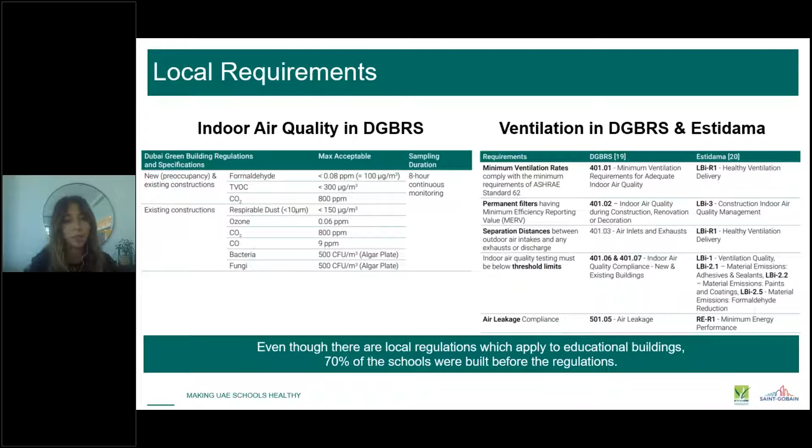So moving on to the international regulation. In the UAE, the most well-known and adopted international label for green building is LEED, version V4 for building design and construction. We have prerequisites for indoor air quality that concern the design of the ventilation system.

We have minimum requirements based on ASHRAE and CEN standards, and additional credits are awarded for enhanced indoor air quality strategies, like indoor air quality assessment, whether before occupancy or under typical normal conditions.

Compared to Dubai Green Building Regulation, LEED is more stringent on formaldehyde and PM limit values. It's also more stringent for TVOC because it includes values for other individual VOC components, whereas the Dubai regulation only sets a limit for total VOC.

Another difference is that LEED recommends ISO methods to measure those pollutants, whereas the Dubai Green Building Regulation recommends continuous monitoring. We will know more about these measuring methods in the case study.

There is also LEED version 4 for existing buildings for operation and maintenance, and credits are also granted for enhanced indoor air quality strategy, which covers CO2 monitoring on a regular basis.

We also have WELL standards. In version 2, there's more focus on occupants' comfort, well-being, and health compared to LEED. For air quality, WELL version 2 has a total of 14 criteria, out of which 4 are mandatory and 10 are optional. The ventilation requirements are the same as LEED, but WELL version 2 has stricter value limits on indoor pollutants.

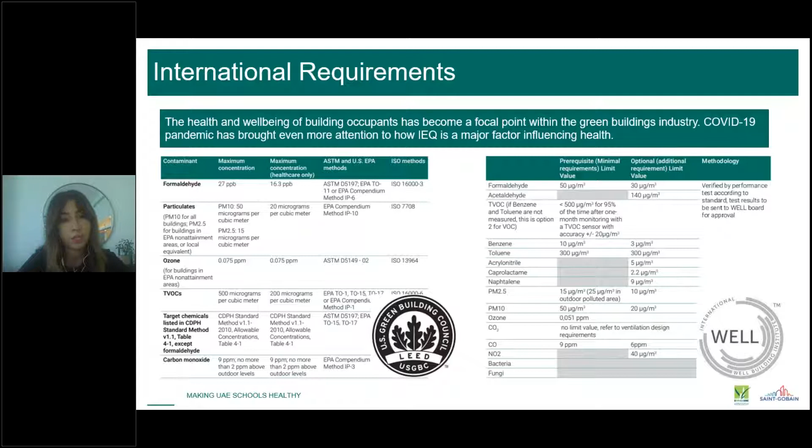Hello, can you hear me? Yes, Valérie. Cool. So Jason, do I have the lead on the slide? I have the hand on the slide? Yeah, I'm just going to hand over controls to you, Valérie. Just give me one moment. No problem. So thank you very much, and good morning, everyone. Sorry for the delay, I had some technical issue to connect, but now everything goes well.

So I'm very happy to be here this morning and to present with Vincent the result of this collaborative project between Saint-Gobain and the Emirates Green Building Council. Before entering into the details of the case study, just a few words about Saint-Gobain and the importance of indoor environmental quality and building science for Saint-Gobain.

Thank you, Jason. I think now I have... no. Oops. Okay.

So actually, innovation is part of Saint-Gobain's DNA, and innovation is not only a matter for the R&D team, it's in fact a joint effort between different functions. It involves R&D, but also marketing, purchasing, and many other functions. And as part of the central R&D organization, it's one of our missions to support our local teams and share with them our expertise.

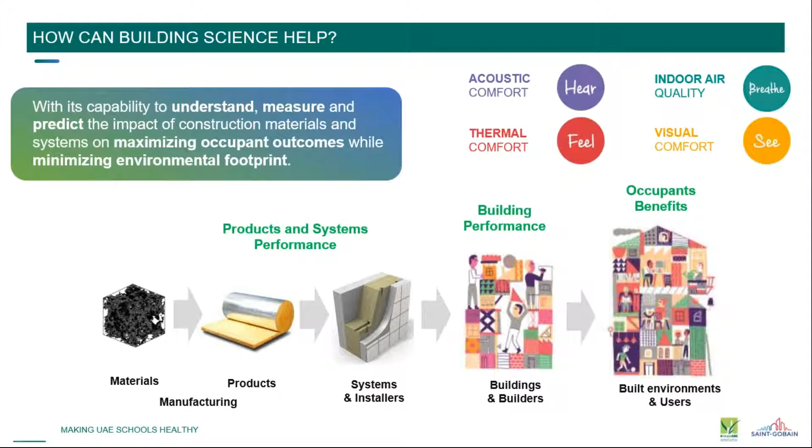And so I am involved with Vincent. We are both working together with the team on the indoor air quality pillar within this building science program. Throughout the years, we have been developing and acquiring knowledge on the different aspects of indoor air quality, and we have in-house facilities to perform experimental tests according to standards, both at lab scale and at full scale.

We also developed some communication tools, such as an edited book. We edited some illustrated booklets which target non-experts in IAQ, available both for our internal team and for our external consumers.

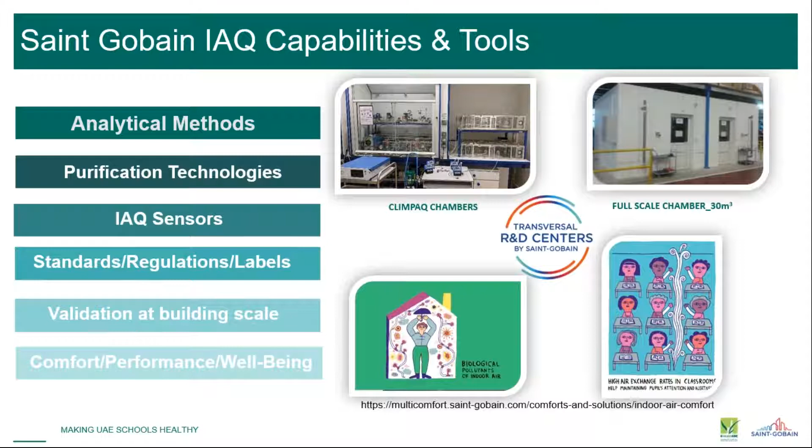Before running the campaign, we had to go through important preparatory steps. The local team had to identify a representative school location and get approval from the school management to perform the case study. Once this first approval was obtained, a school visit was organized to find the representative location within the building where we could perform the measurements. Based on this visit, we designed the case study and detailed experimental setup. With the protocol finalized, we reviewed it with school management again to get final approval, and once everything was fine, we could run the campaign. Those preliminary steps were very important and critical, and the school management was very collaborative during preparation and while we were running the campaign - we were very well welcomed on site.

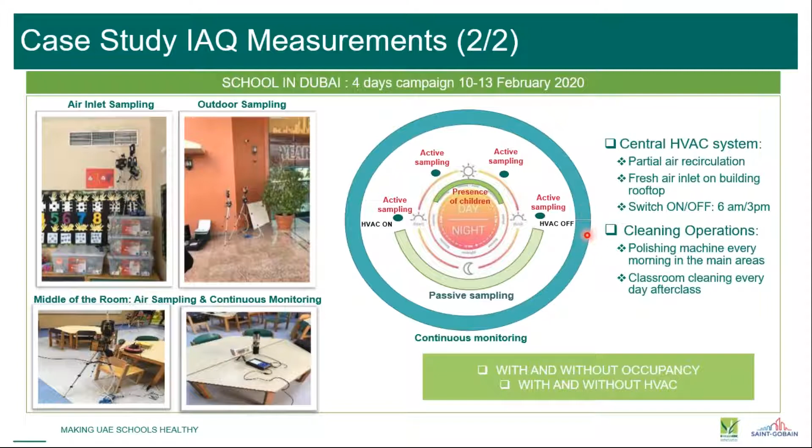The campaign was actually run, as I mentioned, 1 year ago, in February, during 4 days.

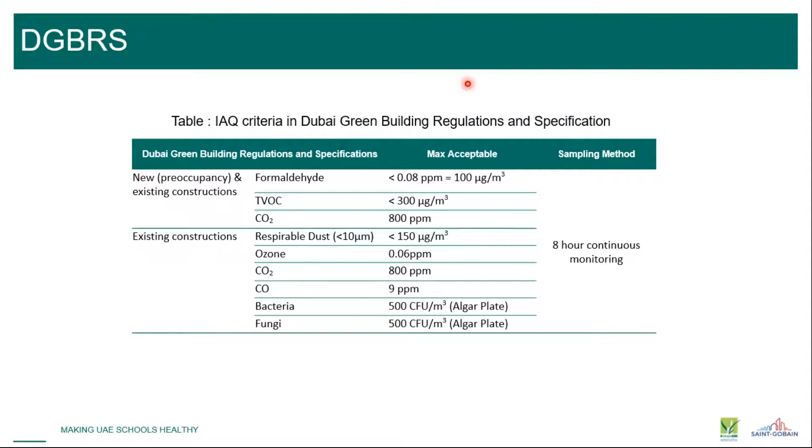For all the measurements we present, we compare each one with the limit values set by the local green building regulations, in this case the Dubai green building regulation that Nada mentioned. When we measure data not mentioned in this regulation, we compare them with other well-known international green building standards such as LEED and WELL.

So let's now enter the details of the study findings.

Carbon dioxide is not directly an indoor chemical pollutant, but it provides very valuable information because it's an indirect indication of the quality of air renewal and of the ventilation system in a room. It's also easy to find inexpensive sensors to measure CO2 concentration continuously.

What is commonly acknowledged is that above a certain concentration of CO2, usually considered to be 1000 ppm, we start to experience some discomfort. In children, it impacts learning abilities and concentration. I'm sure you've all experienced a 2-hour meeting where you feel sleepy after a while, most likely due to a high level of CO2 in the room.

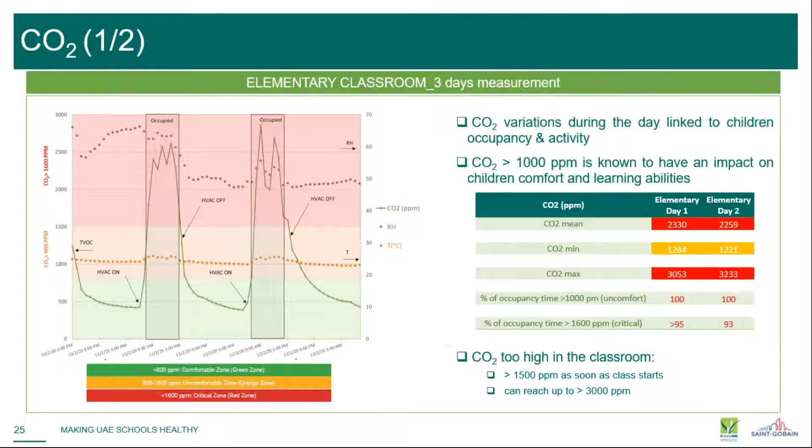We think this is because the HVAC system recirculates part of the air and brings only partially fresh air from outside. We believe this recirculation is the reason for this effect, and it promotes cross-contamination - CO2 coming from the other room to this empty room. What we observe here with CO2 may indicate the same impact of this recirculation on the redispersion of pollutants.

So this indication is also additional information about the HVAC system, which we think could be something we would recommend to improve in the building. One final thing I would like to mention.

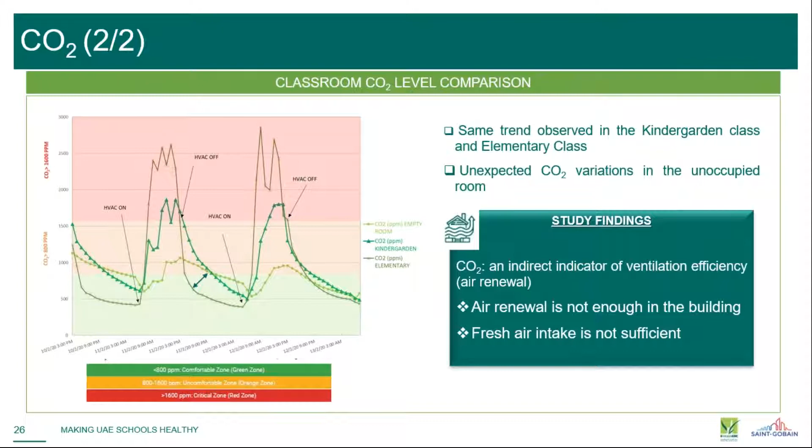So CO2 provides very useful, valuable information. And we also have a look at temperature and humidity. Even if we know they are not direct indicators of indoor air quality in the building, we know they can have an impact on pollutant emission.

On this graph, we have temperature in orange and relative humidity in gray. The table indicates the mean value recorded in the two classrooms over two successive days. We can see the color code comparing this value to the Dubai Green Building Regulation and specification. We observe a difference of temperature between the two classrooms, which we consider to be due to the HVAC settings.

What is important is for relative humidity: we have first a difference between the rooms, but most important is that from one day to the other, we have a significant difference and a decrease of humidity in the classroom.

During the same period, we collected information about outdoor relative humidity level, and actually the variation of indoor humidity level is fully consistent with the variation of outdoor humidity during the same period. So from this, we can conclude that the HVAC system is not doing anything to control humidity indoors; it's just bringing the outdoor humidity in.

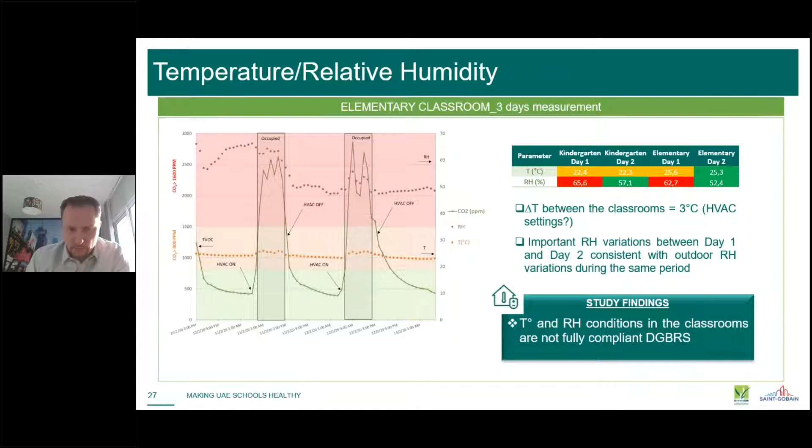So now we will continue with the chemical pollutant evaluation. But first, okay, I want to move the slide. So now we will continue with the chemical pollutant evaluation.

But first, I would like to share some information and take one minute to define the parameters we have considered in the chemical pollutants. The first one, called TVOC, for total volatile organic compounds, is an indicator of the global chemical pollutant level in the room.

There are two different ways to define these results. The first is given by continuous monitoring, where we use a sensor which reacts with chemicals and gives directly a signal on site. The second way is to use air sampling with cartridges, where we catch VOCs on these cartridges, but afterward we need a step in the lab to perform the analysis, so there is no direct reading on site.

In this case, the TVOC value is the sum of all individual VOCs we can obtain between hexane and hexadecane. So it's the definition of this value. That's why it's not exactly the same result between the two ways of measurement.

With air sampling, we have also additional information about the individual VOCs, because with lab analysis we are able to identify each chemical present in the air, and we are also able to evaluate the concentration of each pollutant. This helps establish the link between the pollutant and some health impact or well-being, which is why it's a really complementary approach compared with continuous monitoring.

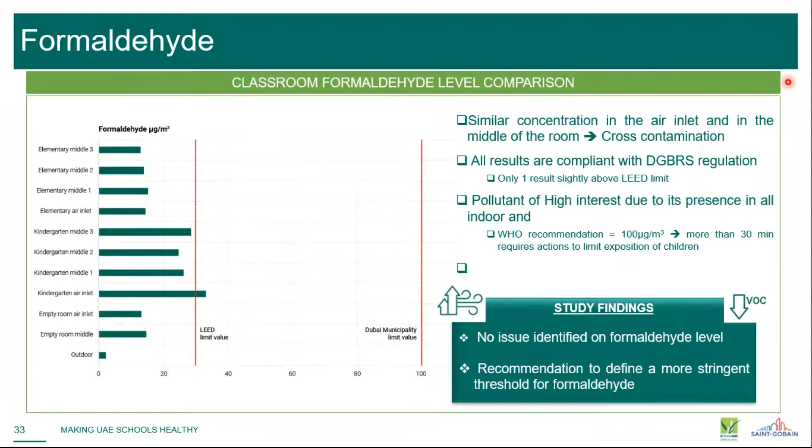Thank you, Vincent. So just some quick information about the other parameters. As we said, the focus was on indoor air quality for this case study, but with our device we were able to get some preliminary information about acoustics by recording the noise level in one of the classrooms. So you have here the noise level recorded in one of the classrooms for the duration of the day.

With what is considered to be the comfortable zone represented here, we can see that the noise level reached quite a high value, in fact similar to a road with traffic when the children are here. And even when the room is unoccupied, the noise level is still above the standard, the comfortable zone. So we could think of ways to improve this parameter as well.

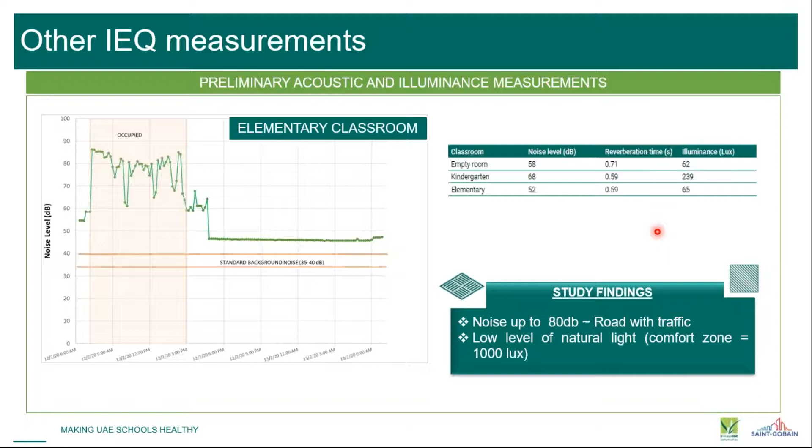Regarding natural light in the classroom, we've made some illuminance measurements, and the values are indicated here, and they are very low compared to what is considered to be the comfortable zone, at 1000 lux. It's true that we could see in the classroom on the windows that there were window films, probably there to avoid, during the hot period, too much heat and too much light entering the classroom. In addition to this window film, on some of the windows, we could even see that teachers or children have put up paintings and drawings, probably also to improve thermal and visual comfort during the hot period. So these early findings will need to be completed by other measurements, but seem to indicate that there are other comfort aspects that could still be improved in this school.

So globally, this is the main finding of the case study that we have performed. To our knowledge, this is the first published study in the UAE that combines standard air sampling methods and continuous monitoring. We hope we have proved to you that it shows the complementarity of both types of measurements. I forgot to mention, but for the measurements we used a third-party lab that is accredited by the Dubai municipality, and at the same time we also did our own measurements, so that we have quite a valuable set of data.

This study was performed only for a few days in January, which is not the hottest period for Dubai. It would be interesting to see what the results would be in the hottest period, and we could expect that it should be worse actually.

But based on the measured parameters, we can already provide what we think are valuable recommendations to the school management to improve the current situation and target the green school criteria.

Regarding indoor air quality, we mentioned several times that the ventilation system is probably a reason why we have an issue with air renewal and an issue with cross-contamination. So it could be interesting to review the setting of the central HVAC system, and also regarding the impact of the control of humidity in the building.

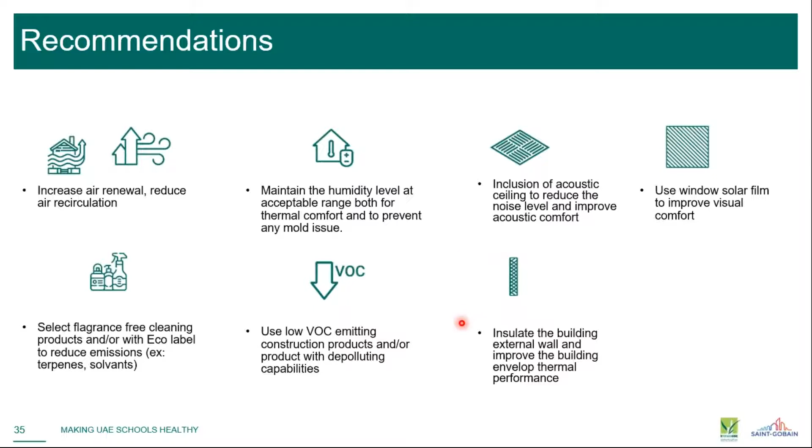And for the other comfort aspects, we could also make some recommendations to improve the acoustic, thermal and visual aspects, and the thermal comfort provided by the building envelope.

Just to conclude on my side, at Saint-Gobain level we can propose solutions and systems that address these different aspects for new construction, but also for retrofitting. So construction products with low VOC, or construction products with depolluting performance, such as the Activ'Air technology, which can be included in plaster boards for partition or in acoustic ceilings.

And also some other products with low VOC for insulation and for tile fixing. And for the construction market, we also make sure that all these products comply to local certification and labeling schemes, and the local team can provide you those documents for the different products.

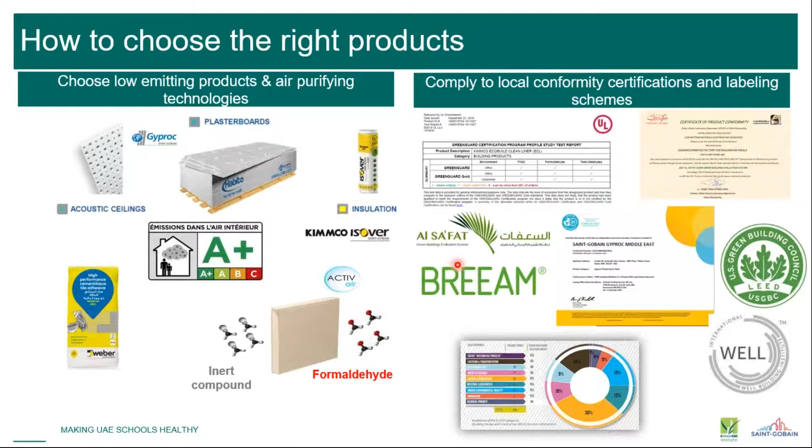So I think I will leave back the floor to Jason now. Yes, thank you, Vincent. Thank you, Valerie, for guiding us through the case study results. So my section, I'll be talking about the call to action.

It is important to realize that for the purpose of the study, only one school was selected, and it was an atypical school, so it does not reflect accurately on the state of all UAE schools. But based on our work over the past few years with the Emirates Coalition and the roundtables, as well as the results from the studies, we have listed several recommended actions as a call to action to diverse stakeholders across the UAE.

This is to ensure that there is coordinated action and movement towards improving the indoor environment of the UAE schools. For policymakers, the recommended actions are to update the local green building regulations and use air sampling and continuous monitoring; to update local regulations to include identification of individual VOCs; set and mandate IEQ standards and codes in new and existing schools; have thorough and regular inspections of IEQ levels incorporated with their school ratings or performance.

And lastly, to provide incentives or enact policy enabling the IEQ industries. For schools as the main stakeholders, obviously they have an integral role to play in incentivizing or transforming existing schools towards green and healthy schools.